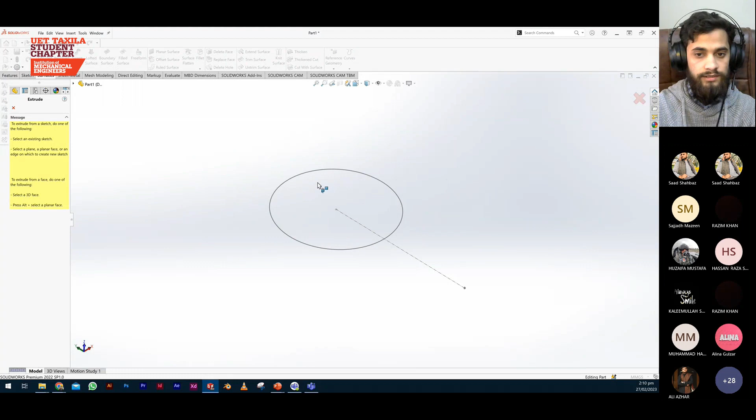Now let me just get rid of this, and now we will learn about the extrude command. So extrude command is actually the most basic command when it comes to solid modeling, and it is similarly used in surface modeling too. It just extrudes a sketch. By default, it extrudes perpendicular to the sketch plane that we are making, just extruding the sketch into one direction. But when you apply this to solid modeling, then you will have a solid body, a cylinder here. But when we apply this in surface modeling, then you will have a surface of 0 thickness. So this is about extrude command.

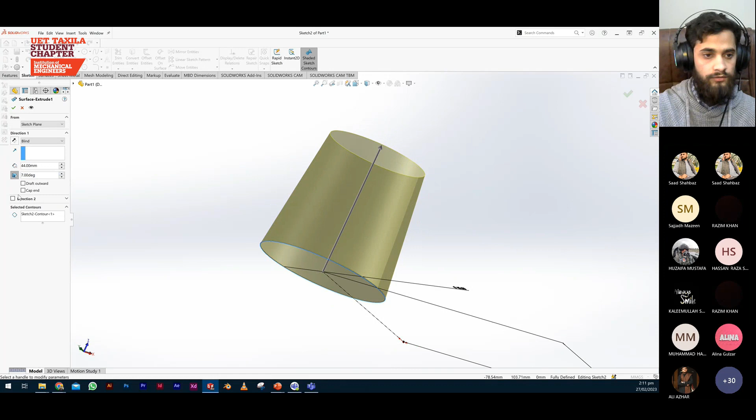And you can also play around with different properties of extrude command. You want to extrude from the mid plane, then it will extrude equally on both sides. You want to have a draft angle on the inside or on the outside. If you click draft outward, it will draft outwards, and this will be your basic extrude command.

Okay, so now we will move toward the next command, which is the revolve command. So for a revolve command, I will make a different sketch. Let me just have a center line around which we will be rotating our geometry. Let me create a basic sketch, something like a vessel or vase, with some basic dimensions.

30 millimeter over here. We'll add a horizontal constraint on these two points.

The most important thing when it comes to modeling, according to me, is defining your sketches. If your sketch has any blue lines, it means it is not completely defined, and when you want to move it, it can move. If you click some of the blue geometry and move it around, you will see the degree of freedom that I need to remove to define the sketch completely. Right now, if I move this point, it is only moving horizontally because all the other aspects of the design are constrained. So I need to constrain this degree of freedom to make sure my sketch is completely defined.

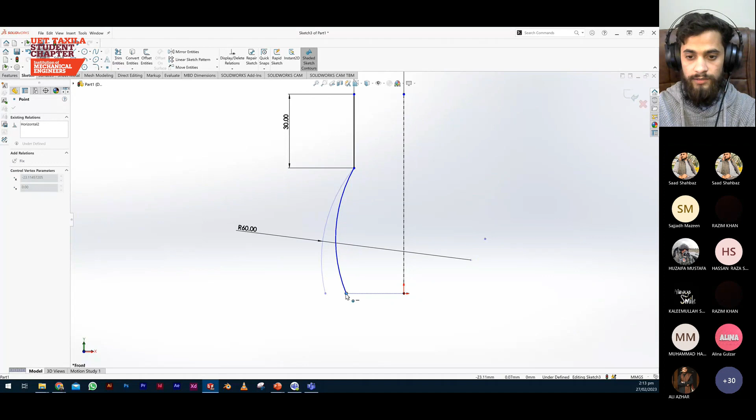To make sure this is defined, I will make it coincident to this line. Now this one is not defined, you can see. So I will give it a dimension right here. Let's say we give it 45. Now the sketch is completely defined.

Now we will go to the revolve surface command. You can see it automatically detects the axis around which it is supposed to revolve, and it will create a surface body by revolving our sketch around that axis. You can also play around with the properties of the surfacing of the revolve command. If I do not want to revolve a complete circle, let me just make it 90. It will just make a surface like this.

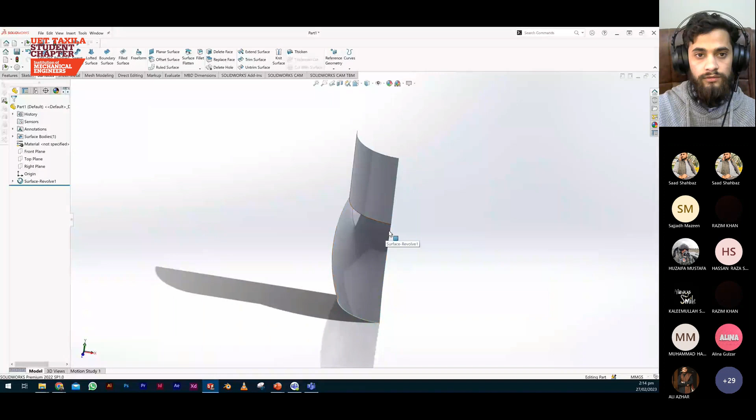Pretty simple, right? So these were our most basic commands, the extrude and the revolve command. You will find these listed in the solid modeling also. So now let me see which commands we are going to do next.

Okay, so I will explain these commands a little bit in detail: the delete face and the delete hole command. In Solidworks, you have pretty interesting commands which can help you remove some complexity from your model. For example, when you are working with a surface and you do not have access to the design tree, and you are supposed to work with some step file or something where you don't know how the design is going around, and you cannot edit it anywhere, you can use these direct editing commands to play around with that model. For example, I will make a hole into it.

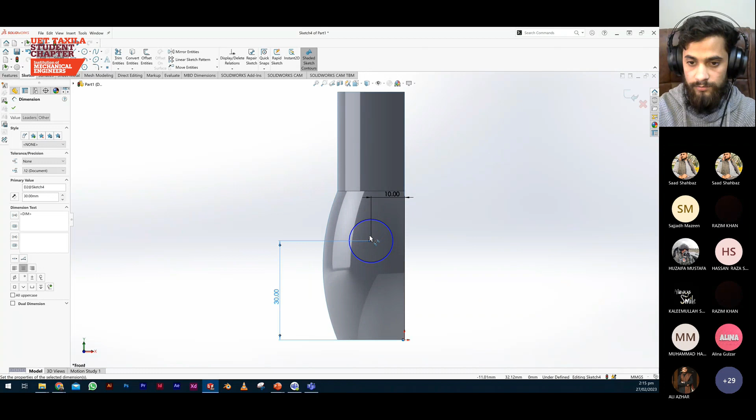I will also explain the trim command and the delete hole and delete face command here. Let me just, I have made a circle here. Now if we go into surfacing, we can see there is an option to trim surface. So what this command will be doing is trimming this surface with this sketch. It will just remove this area of the surface based on what I'm selecting. So now you can see we have a hole here.

So if you get a surface like this from a step file and you do not have access to the design tree, and you don't want to go into the hassle of figuring out how this surface is made or where it is defined, to fix this hole you can just go to the delete hole command, select the periphery of this hole, tick it, and the hole is gone. You can use these methods to fix the geometry of models that are not entirely in your control.

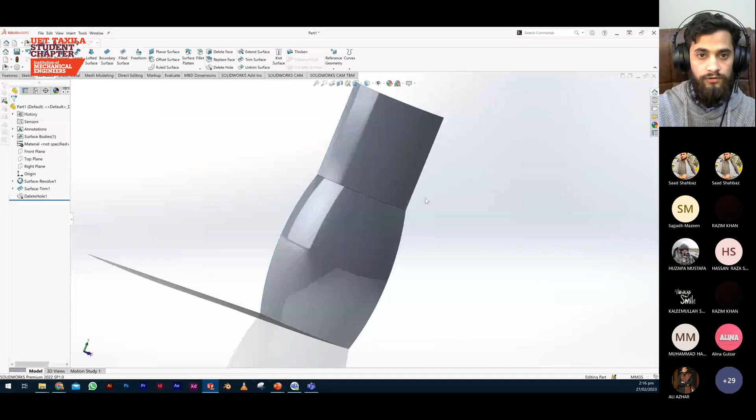Now I will apply a small fillet here to explain the next command. Let's say we have a fillet of around 25 millimeters here. Okay, so now the surface looks beautiful, but if you do not want this fillet, and this is from a model that is not in your control, completely from a third party or something, and you want to have the edge before the fillet was applied, then you can use the delete face command.

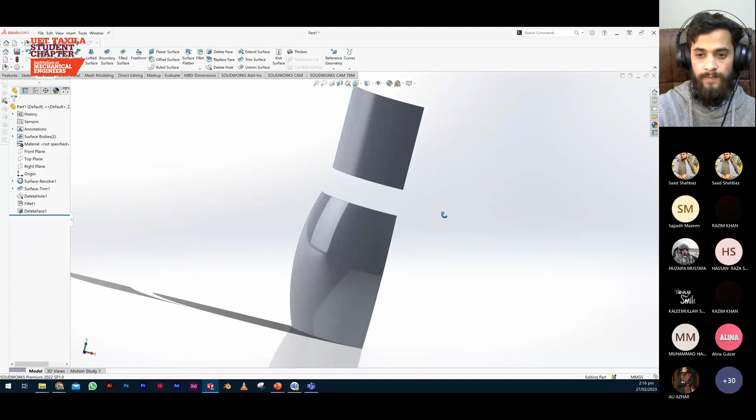What the delete face command does is, if you just select delete here in the left panel and select a surface and apply the delete command, it just gets rid of the surface that you selected. But the interesting thing is when you apply delete and patch, it deletes that surface and patches the surfaces that were connected to it. It automatically extends those surfaces to meet with each other so that your geometry is not affected, and you can use this command in solid modeling also.

So that was about delete surface. We have covered trim, delete hole, and now let's see how the untrimming surface works.

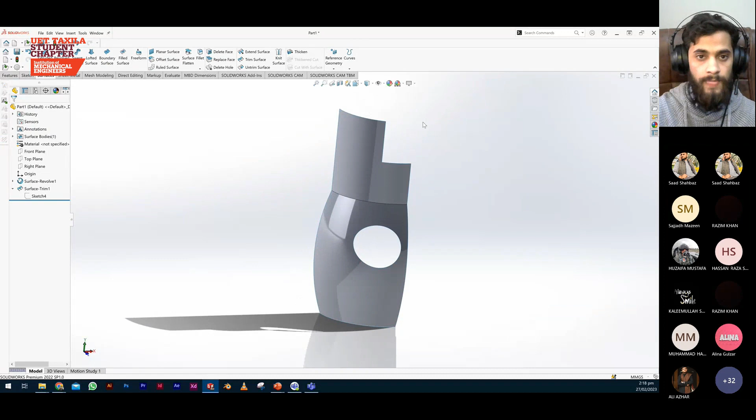Now if the surface is not only trimmed around this but also around this part, we have a cut of 15 millimeter by 10 millimeter here. So you can see this part is also gone, and you want to recover this part. You will select the untrim surface, give it the edge that you want to recover. It will automatically detect that this surface is missing and we need to untrim it. You want to click OK, and this is how it will fix the surface.

So that was about the untrim command, and now we will move forward to the next commands, which are sweep, loft, and boundary surface, etc. So I'm going to make a new sketch for the sweep command. Let's make a sketch.

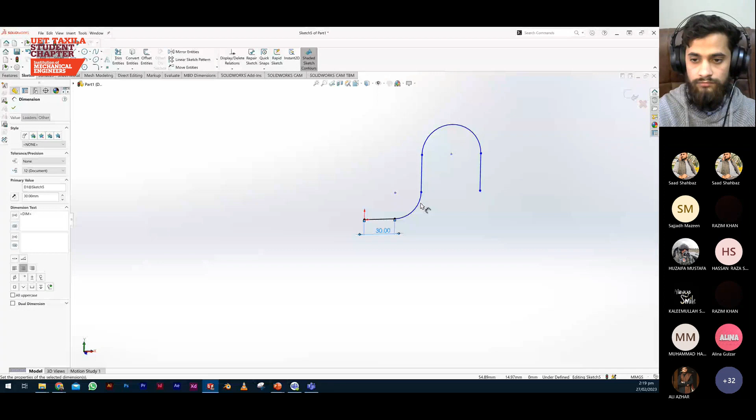This will be the path around which we will sweep a profile. Let me just define it real quick. This is our path sketch, and now we will have a profile sketch right around here. Let me just make a circle, give it a diameter of, let's say, 15. There we have a path sketch and a profile sketch.

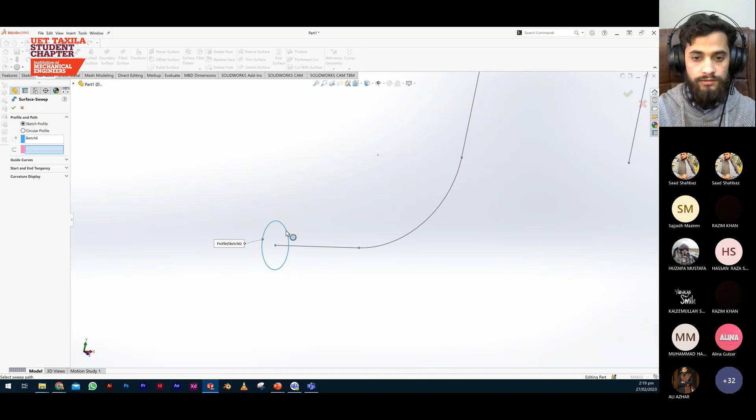And if we go into the sweep command and we select this profile and this path, then we will have a sweep command which is quite similar to the one we have in the solid modeling aspect, but you will see that it is hollow from the inside, and if I section it, you can see that we have a zero thickness surface here. This one is quite similar to the one that we have in solid modeling.

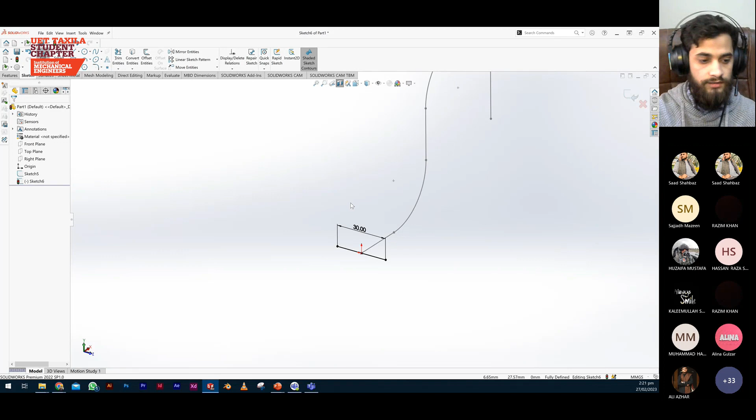So let us have a different type of profile here. If I edit this sketch and make an open contour here, which is just a line, and let's make it horizontal. When your sketch is completely black, it is a sign that the sketch is completely defined, and if there's something blue, then you need to find out which part of the sketch is not defined and apply constraints or dimensions to make it defined.

Okay, so this is where surface modeling is different from solid modeling. In solid modeling, we won't be able to sweep it around this path because it will say that it needs a closed contour. So if I make a surface out of it, then it can be done. It eliminates a lot of complexity from your design and makes several things easier for you. You don't need to worry about zero thickness geometric problems and things just not fitting in when it comes to solids.

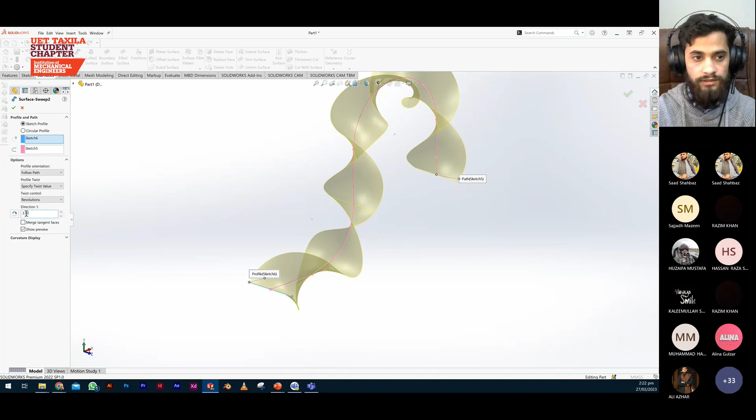That's where surface modeling is actually simpler than solid modeling. And one of the interesting things shows up when I am able to twist the path. Let me just apply a twist of revolutions. You can see it creates a very interesting form of geometry.

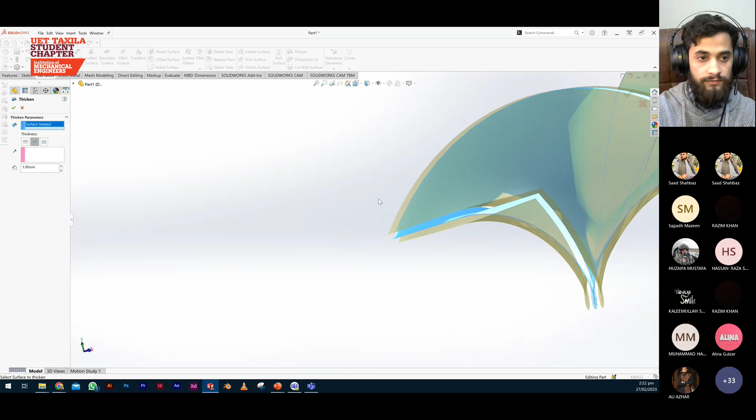As I mentioned, surface modeling is mostly used in parallel with solid modeling, and our eventual goal is to create a solid body, because otherwise you cannot manufacture anything with zero thickness. So if I want to apply a thickness to this surface now, I will use the thicken command, and let's say I apply a thickness of 1 millimeter. We can choose the direction of thickness. We have this direction, the opposite direction, and the mid direction. So when selecting mid direction, it will do 1 millimeter on both sides, so the total thickness will be 2 millimeters.

So yes, these type of interesting geometries can be created with surfacing, and they are way more difficult to create with solid modeling. It is possible, but it makes the process very complicated, and the modeling is mostly unstable, and it is very likely that you will get errors when you're changing your model.

So now we have also covered the thicken command. Now let's get rid of this also. Now we have the loft command, which is considered one of the complex commands when it comes to solid and surface modeling. So let me just create a sketch on top plane.

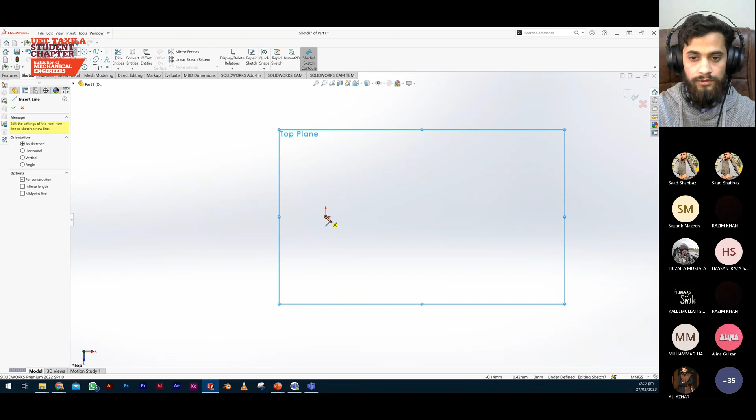Let's create a construction line here, and after that we'll get an arc here. It's coincident. Now I will apply a symmetrical constraint to these two points. So what this constraint does is it has made this and this point symmetrical around this axis, and if I move this part, the other part will move similar to it.

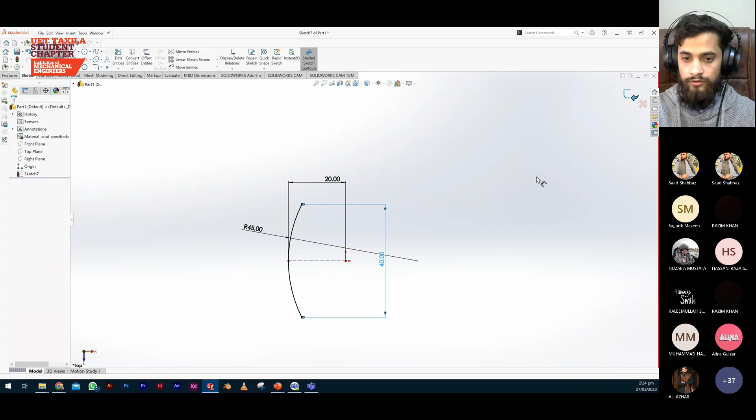Now let's say 45, and let's give this a dimension, and now the only thing which is left to be defined are these endpoints. So let's give a dimension of about 40 millimeter. So now we have one sketch here. Now let's go to the right plane and create another sketch, which will be quite similar to this one. So I'm making these sketches to actually explain the loft command.

Let me just define it like we did in the last one. 20. Let's make this... let's change this actually to 60. Now if I give one dimension here, it should completely define the sketch. But these are not symmetrical yet, so I will apply a symmetrical constraint here.

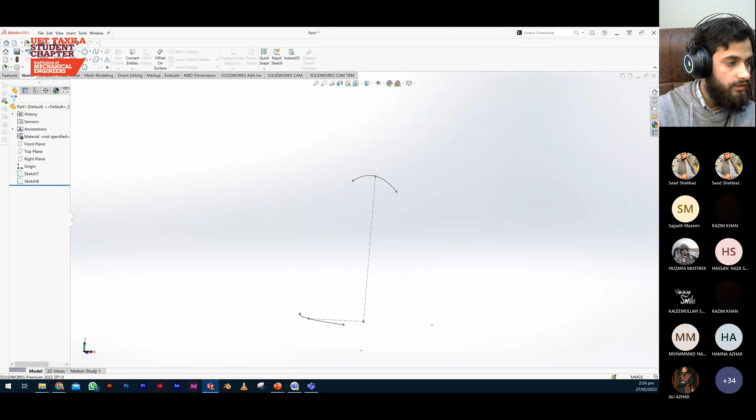Let's change this dimension, and now we will apply a loft command between these two faces. Let's choose the loft surface. I will choose the first profile and the second profile, and it will just bind these two profiles to make a simple lofted surface.

Now the interesting thing is that you can apply start and end constraints, the most famous of which is the normal to profile. What this constraint does is make sure that when you are creating a loft command and joining two surfaces like this, it starts with a curvature or tangency to the plane on which we have drawn the sketch.

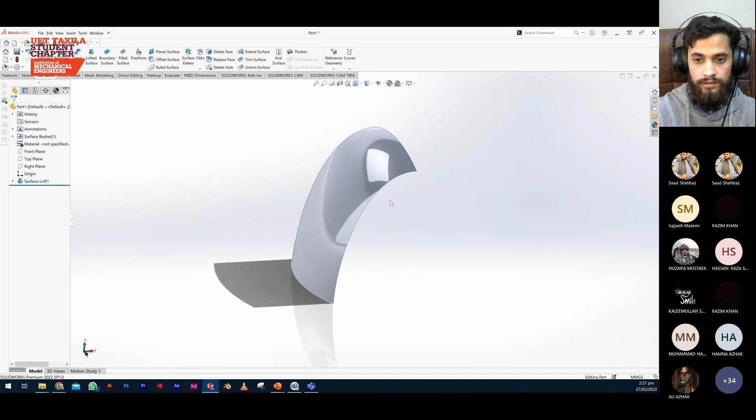So we will apply the same on this end also. And now if I click OK, you will see that we have a beautiful looking surface here.

Now I will go through the boundary surface. What the boundary surface does is you give it a specific boundary and it creates a surface by joining those boundaries. So if I give these two boundaries, its direction is not fine, so I will take this green line, and I think there has to be an issue.

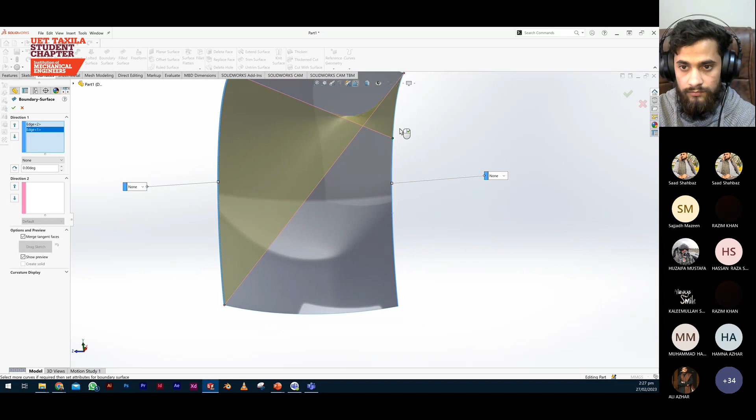Yeah, it's taking the edge as opposite, so let me just try to fix that problem real quick. Yeah, now it's fine. So what it did is create this line as a boundary and this line as a boundary, and creates a surface between those two lines.

So now we have a plane surface here, and if I go into the section view, you can see that we have two surfaces, one that we lofted and the other one as a boundary surface.

Now to go through the fill surface command, it is somewhat similar to the delete hole command, or in terms of the use that I'm going to put it here, but you will see the difference when it actually happens.

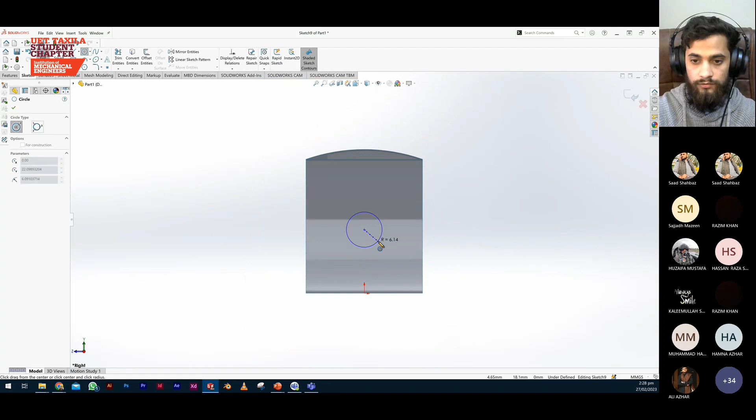So now let's create a hole in this lofted surface. How are we going to do this? We will use the trim command. This one will be the trim tool and this one will be the surface that we are going to trim. If we hover onto the surface, you can see the different sections it is trimming, so if I'm removing the selection, I will select this surface and click OK.

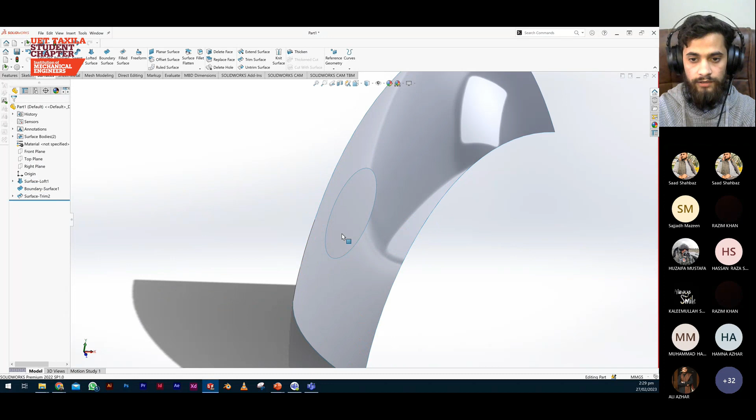Now we have a hole in our surface which we created with the loft command. Now let me just hide this one. If I choose the fill surface command and give it this boundary, it will fill the hole with a surface, which is not completely tangent to the boundary it is supposed to be on.

You can edit those settings manually, but if I section here, you can see there is a specific curvature difference between these two. Right from here it has a specific curvature, here it also has a specific curvature, but this one seems pretty flat.

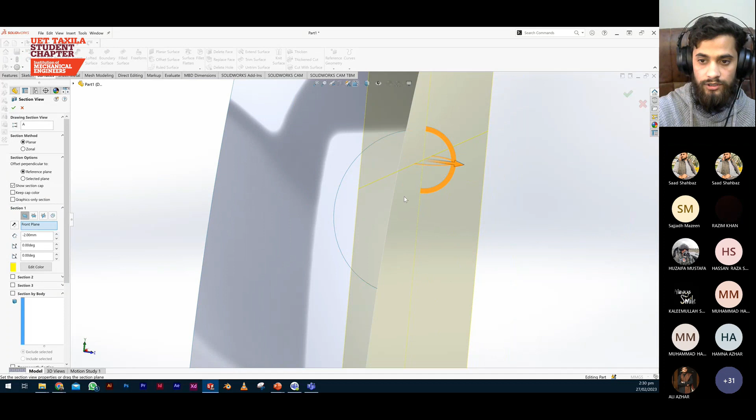So if I edit this and apply a curvature constraint so that it maintains the curvature of the surface it is connected to at the boundaries, now it will almost have the same curvature. If those two surfaces are joined together, you won't notice a difference here, and you will feel that this is completely actually a single surface.

So that was about the fill surface command, and now we have the most interesting command in surface modeling. One of the most powerful things you can do with surface modeling is convert a surface into a freeform surface. A freeform surface takes a surface and divides it into a grid.

Let me just show you. There you can see the freeform command. And if you select a surface, you will see that it divides it into a grid of different sections.

Now I will add a curve in the middle, almost in the middle, and after this we are supposed to add points to this curve that we have added. And now is the most fun part.

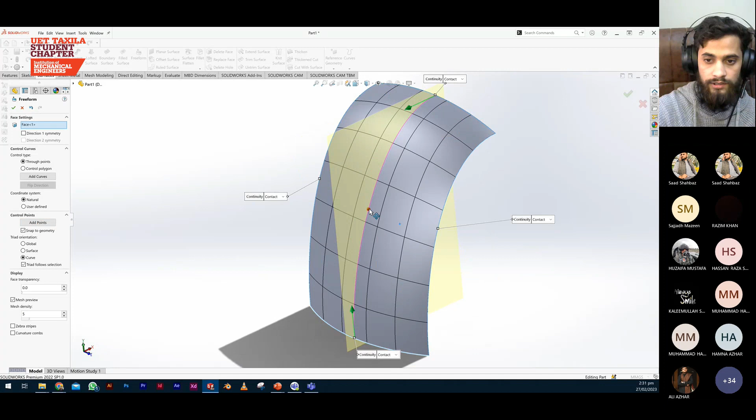Now if you select a point, you will see that it is giving you a specific option to move this point around in 3D space, and if you move it around, you can see the surface will move with it. This is the closest thing in solid modeling that comes to wireframe modeling or organic modeling, which is a completely different field.

So this gives you way more freedom over how you want to edit your surface. You can add multiple curves, you can add multiple control points, you can move them around to get a surface of how you want it to be.

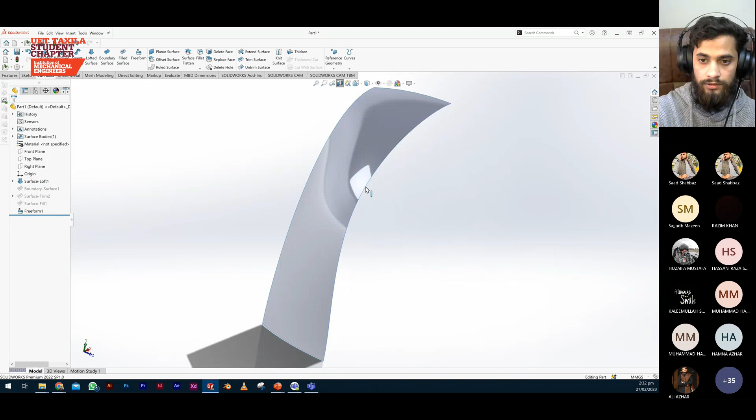If I go into the section, you will see that this line is deformed as compared to the sides because we converted it into a freeform surface. So this is one of the most interesting commands in surfacing.

Okay, so now let's finish up with the commands here. Let's just cover the offset surface and the ruled surface. So what offset surface does is it takes a surface and offsets it along the normal of the surface to a specific direction.

If I change the direction, you can see that this is up to where it will offset the surface, and it will create a new surface for you. So this is also one of the most interesting features of surface modeling that you cannot get with solid modeling.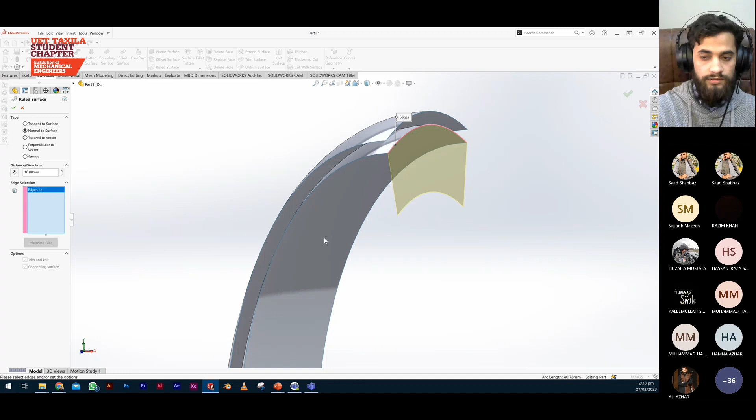And for the ruled surface, if you have a boundary of a surface and you want to extend it normally or tangentially to the surface, then you can do it with the ruled surface. There are a couple of different options too, but the most commonly used are tangent to surface.

If you click tangent to surface, you can see that it is creating a surface which is tangent to it. And if we create normal to surface, then you can see that it is creating it normal to the tangent of the surface. So this is the ruled surface.

Let me see if we have anything else to cover. I think we have gotten almost everything. Only one of the finishing commands is left, and that is the knit surface.

Let me just delete the commands that we are not going to use here, and suppress the boundary surface. So you see we have this boundary surface here and this lofted surface here. And if you go into the surfaces menu, you will see that we have two different surfaces.

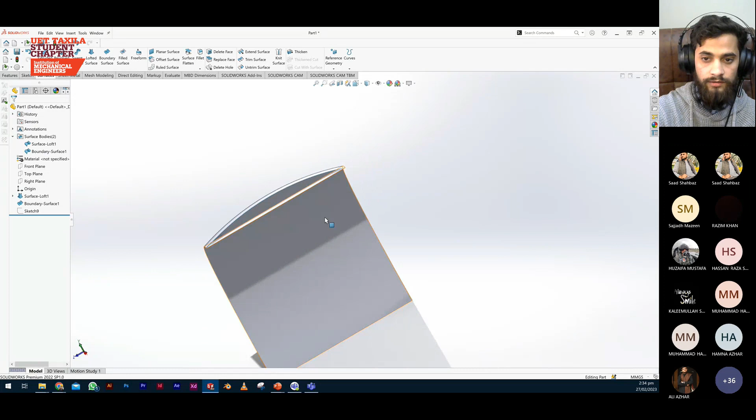It is not treating them as a single surface, which can be further used to do different things at the edges, apply fillets and manipulate the surface as a single surface. So for that reason, what we need to do is we need to knit the surfaces together.

So when you are knitting the surfaces together, the surfaces need to touch each other at the edges. If I knit them together, you can see that before I applied this command, these edges were blue. The blue edges represent that a surface is ending or starting from there, like these edges.

But we don't want to end this surface here, and we want these two surfaces to be treated as a single surface. So if I apply the knit command, you can see this edge is converted to black.

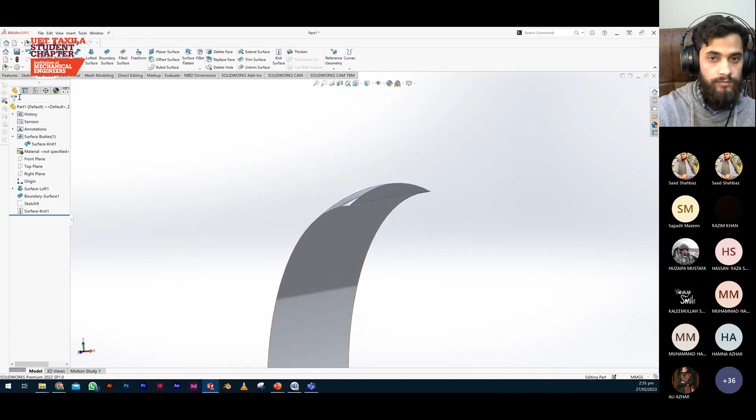And now if I wanted to apply a fillet on this edge, let's say a fillet of around 1 millimeter, then you can possibly do that.

One of the other features of knit surface is that if the surfaces combine to form a closed geometrical space, then you can also convert your surfaces to a solid inside that knit command.

For example, if I create two planar surfaces, if I select this boundary and this boundary, it will help me create a planar surface between these two. So now this open end is closed, and now creating another planar surface, we have this end also closed.

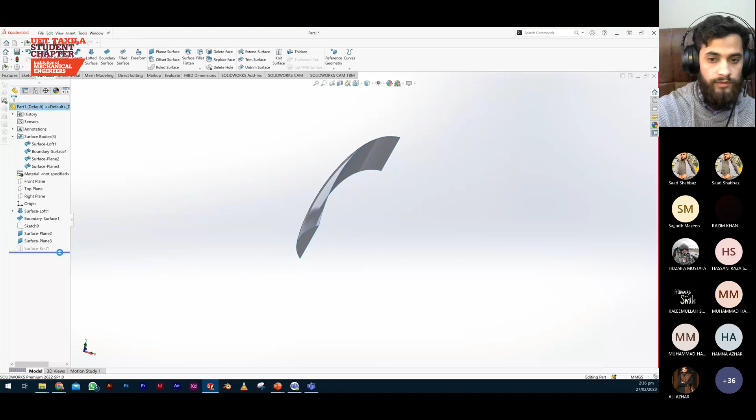Right, so now if I join these surfaces, they will create a watertight geometrical space. But right now there are four different surfaces - this is 1, 2, 3, and 4. So if I knit them together, if I add the knit command and give it the two additional surfaces that we created too, then you can see this option to create solid would be available. If I take this option, you can see now we have a solid body, and if I section it from the middle, you can see that it is solid from within.

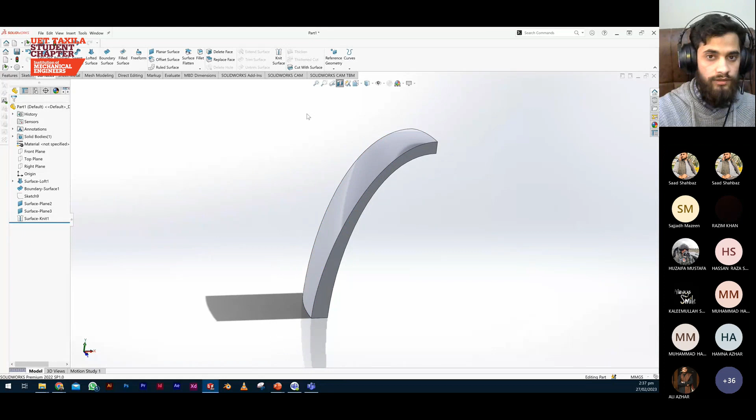So yes, these are the two commands used to convert a surface to a solid: one is the knit command, used to convert a closed space into a solid body, and the other is the thicken command, used to give a specific thickness to a surface, saving you from the hassle of making it with solid modeling. If I convert this, for example, to a solid body, you can see only the top surface is given a specific thickness and converted into a solid. So either you do surface modeling and then convert it into a solid body, or you use surface modeling in combination with solid modeling, so that you can use surfaces as a reference to aid in your solid modeling process.

Okay, so now let's go through some exercises which will explain the uses of the surfacing commands.

I think we are also running out of time, so I will be doing only one exercise here. This is the exercise we will be going through. If anyone wants to take a screenshot, or I will send this to you afterwards so you can follow along. Let me get it to the other screen and now open a new part.

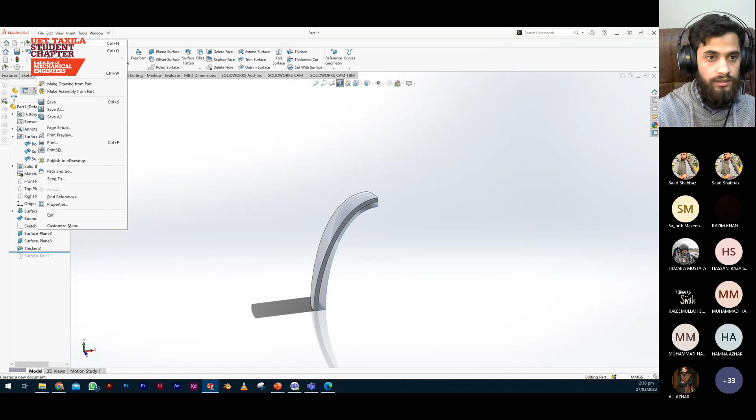The thing we are going to do here can probably also be done with solid modeling, but right now we are doing it to show how these commands actually work in action.

So right now I will create this line. I will give it the dimensions given in the drawing, 95.5 here. I will give it an arc. Just speeding through the process so we can get there in time. Line some reference lines over here and here. Now I will give the dimensions to these reference lines, 100 degrees and 105. Now for the dimension, you can see in the top view that we have a dimension of 33 over here, and also over here.

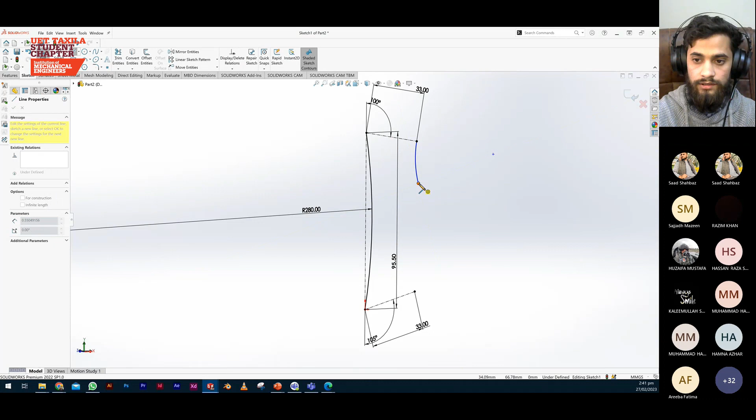Okay, so let me just go through the exercise. Now we see some specific curves here. You can see this curve - this is actually made of 3 different arcs. So we just need to make 3 arcs here and define them according to the dimensions provided. This is the first arc, this is the second one, and this is the third one.

Now let me just define these real quick: 25, 30, and we have 50. And we have a constraint here which is not supposed to be there - let me just remove it so that this curve can also move around. Now the final 2 dimensions are from here, 47, and from here, which is 65.

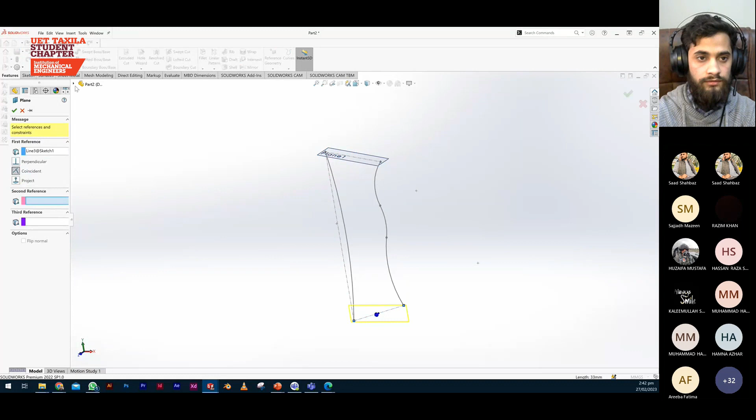Now we have 2 control surfaces for the loft command that we are going to apply here. Let's just create 2 surfaces on which we are going to get the profile. I will select this and this one to create the first surface, and then this and this to create the second surface. Now on this surface we are going to make this profile, 33 by 25, an ellipse - not too difficult. Let's just select an ellipse, and okay, it's the other surface.

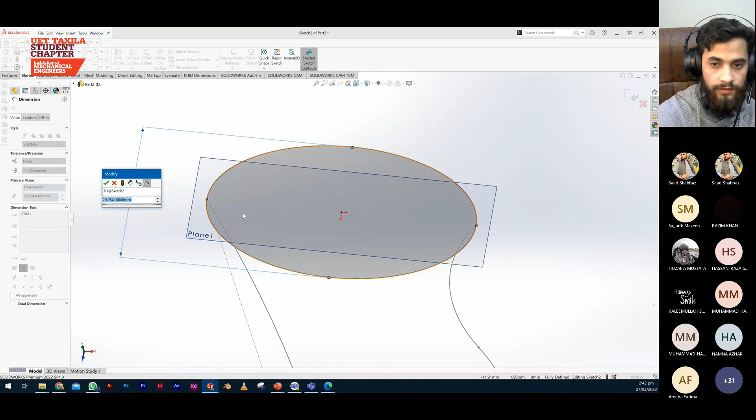Let's just make an ellipse here, to give it a dimension of 25. For the second one, we need to make a sketch on this. Let's make an ellipse here too, and right here we have the dimension of 28.

So now we have the profile, we have 2 control surfaces, but we need 2 more - you can see on the first page. Let me just show you: so we have this radius also, which is a 330 radius from the sides.

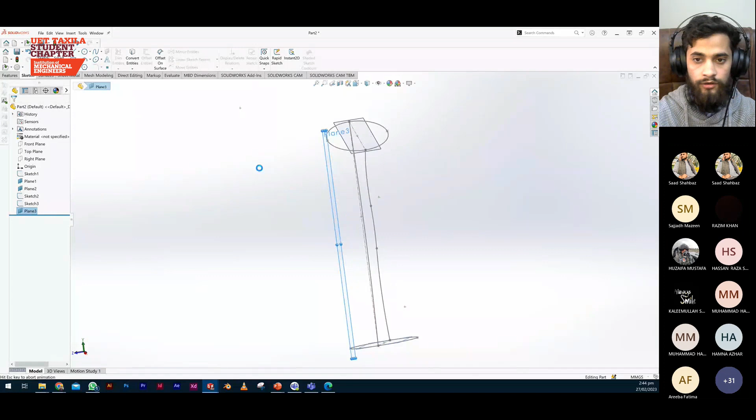So for those I will need a custom plane. First of all, I will select these 2 points and the front surface - so there we will have our reference surface on which we will draw the control lines. So I just need to give it a dimension of 330, and it's completely defined. Now let's just mirror it to the other side.

Let's mirror it around this midline, and now we have all the sketches that we need for it.

Now I'm going to apply the surface loft command. I'll select the two profiles, and then we are supposed to select the guide curves. We have four guide curves: one is this, and the other is a combination of this, this, and this line. Now for the side ones, this is one and this is one.

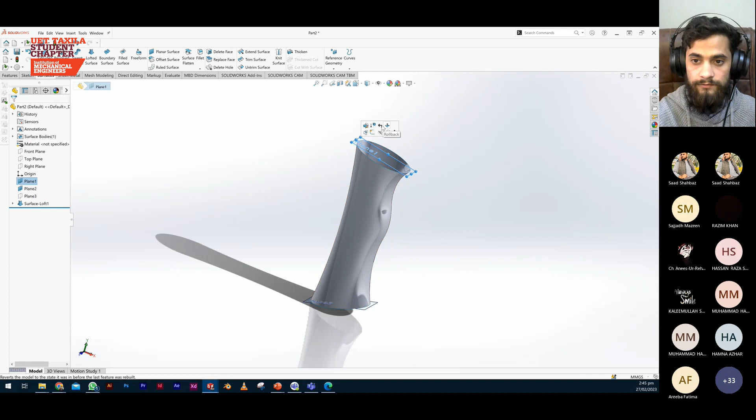Now our lofted profile is ready, and these sort of aesthetic curves are easier to draw in surface modeling than in solid modeling. Let me just make two planar surfaces, one here and the other one here. Now if I select the knit command and select these three surfaces, I will have the option to create it into a solid. So that was the exercise for surface modeling.

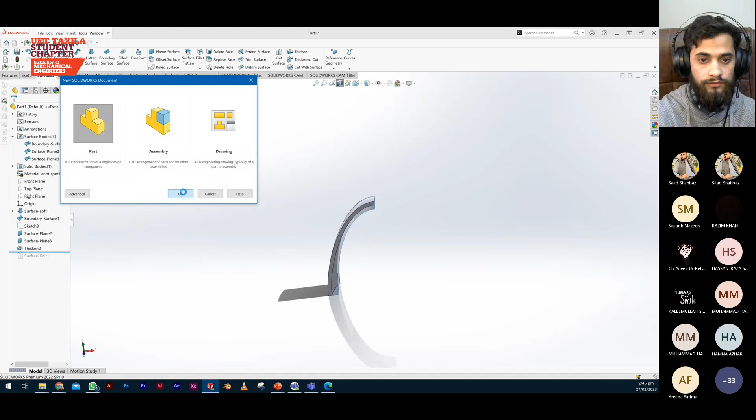Now let's jump into the section of advanced design methodologies, in which first we will cover the usage of equations. For equations, you can think of it like this: if your design is driven by some specific equation, like this side is multiplied by 2 to create this side, or the length is twice as long as the width, then you can create variables and define equations inside SolidWorks, and SolidWorks will keep track of that. Let's go through a basic exercise.

To access equations, go into the Tools drop-down menu, and there you can find Equations. Right here you can make global variables. Let's say the first variable is a, and a is 20 millimeters. Then we create another variable, b, and b is 30 millimeters. Then let's say we have another variable which is 10 more than a, written as a plus 10 millimeters. You can see we have 30 millimeters here, and if I change a to 10, the other one will update itself.

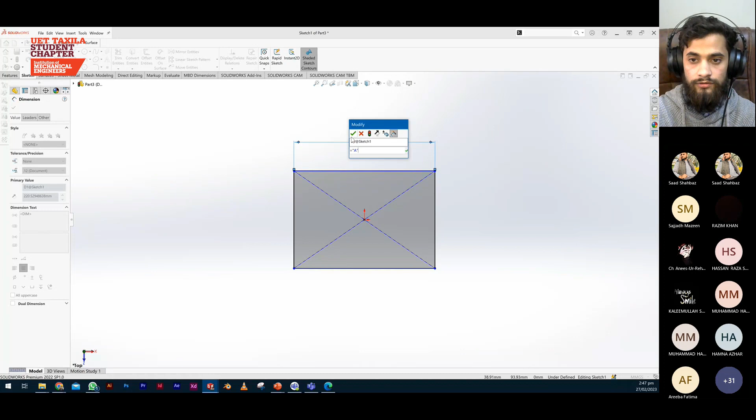Let's see how we can use this inside our design. We will draw a sketch on the top plane and draw a simple rectangle. When you give it a dimension and click the equal sign, you have the option to apply global variables, functions, or file properties. In global variables, I want to give this dimension a value equal to the variable a. If I click a, you see an equation sign showing this dimension is driven by a variable. Now if I apply a dimension here and want it equal to variable b, I select b and click OK. Then you can see this rectangle is defined based on the variables we created previously.

Now I want to extrude it equal to the variable c, which is in turn connected to variable a. If I select c here and click OK, it defines the extrusion as being 10 more than the variable a.

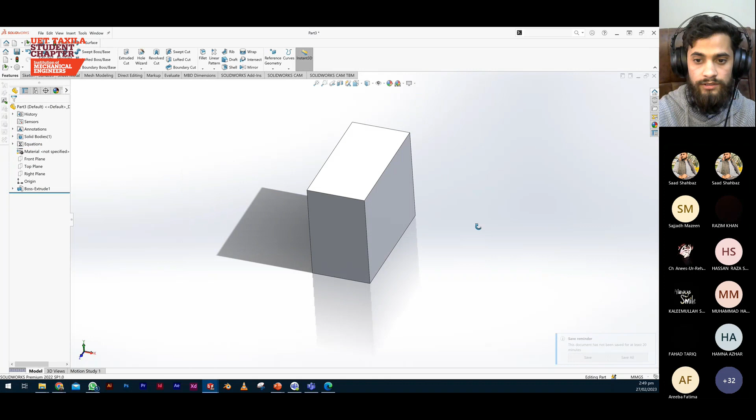If you want to access equations after generating variables, you can do so from Manage Equations, where we have all the variables we created. If I change it to 15, the design will update in real time—see, it changed all the values in the equations.

So that was the use of variables and equations for modeling. Now let's see how we can generate configurations.

If I delete this, you will get an error because the variables we defined are missing. So you just delete it from here and it will be fine. Delete these two, go to Manage Equations, and delete this.

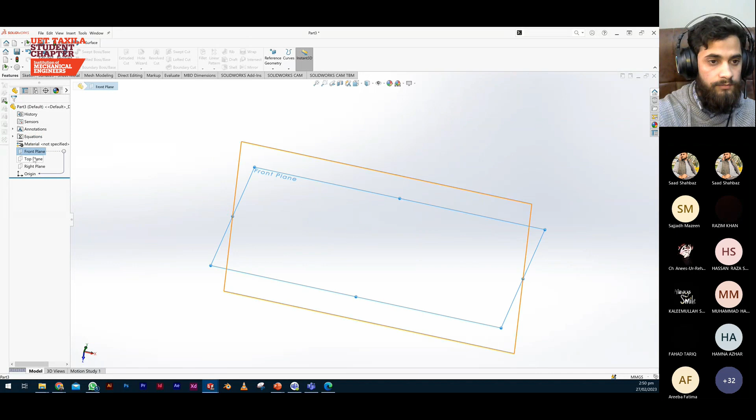Okay, so now we have a clean design tree. Let me create a part in which we are going to revolve a specific piece of geometry.

Configurations are basically used to make different parts which are similar in their design intent, but you don't want to make separate parts for them. For example, if I have a circular part right here which has a diameter of 10, let's say it has a thickness of 8 millimeters.

Another important thing is you can directly use equations without creating variables through this method. If I want to keep this thickness equal to this thickness and want to keep them connected, I will just click the equal sign here, and instead of going into global variables, I will keep my cursor here and click on this dimension. This will connect these two dimensions and make sure that if I change this one, the other one changes as well. So in this way you can make use of equations within your sketch without having any global variables. Let me give it 20 here and 30 here.

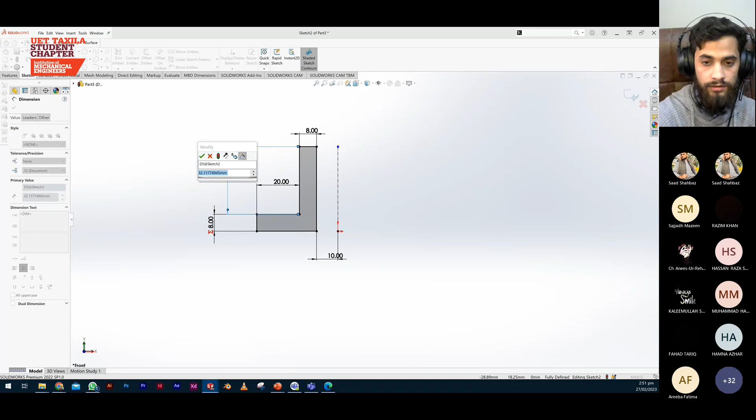So let's revolve this part. Okay, so now we have a part here, and let me create a series of holes in here.

Let's create a hole with a diameter and a distance of, let's say, 25 or 26. You can see that this is the only degree of freedom that is remaining. So if I give this a constraint of being horizontal at this point, then this will be completely constrained.

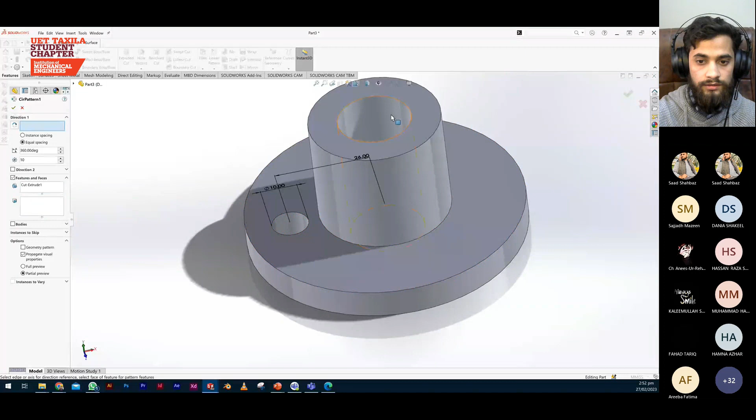Now let's make a hole here, cut through all, and now we have one hole, and I want holes all around it with a specific amount of holes that I need. Let me use a circular array. The feature I want is this one, and the direction is this. So now let's have 6.

So now we have a basic part here. Let's just give some fillets, diameter fillets here and here, so that it looks less boring.

So now I will tell you how you can create different configurations of this part. So you are designing a part and you feel like you need another similar part which is similar in shape, but has different dimensions and different amount of holes or anything.

So I will go into this tab. You can see right here the property manager, and inside the property manager you have configurations. If I right click on it, it will give me the option to add a configuration. So let's say I am doing a version 2 of this part.

Okay, so if I am changing any dimensions here, let's say version 2 is going to have a different thickness, let's say 6 millimeters. So one thing you need to notice is that if I am changing the dimensions here, there's a small sign right next to it which says all configurations, which means if I change this dimension, it will change the dimension in all configurations.

And if you want to keep the changes only in your current configuration, then you need to come to this drop down and select this configuration. Now if I change the thickness to 6 millimeters, the dimension is changed and it will only be changed in this configuration. Let's say we change this one also.

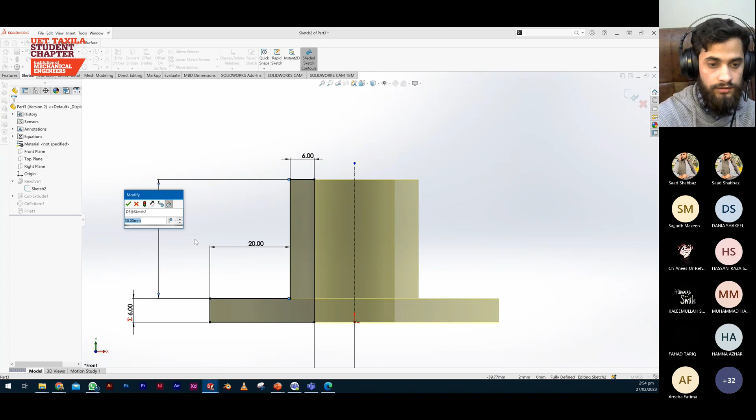We have a thickness height of, let's say, 30, and for version 2, let's say we have fewer holes.

So this can be a little tricky, but you don't need to actually go into this command. You can just click here and it will show you this small variable 6. If you double click on it, it will give you the same dimension-changing menu that we had inside our sketch. So let's say we are only changing this configuration and we have 4 holes in this configuration. If I rebuild, you can see we only have 4 holes now.

So now we have a new configuration. Let's see how we can get our previous configuration back. If I double click on our default configuration, it will take us back to our previous design, and the version 2 that we created is still there in the form of different configurations.

Another thing I would like to mention here is if you are making an assembly, a new assembly, and you have one part but different configurations for it, then you don't need to worry about exporting different parts inside it. We need to save that part before I'm able to insert it into an assembly. Let's say we save this as part 3.

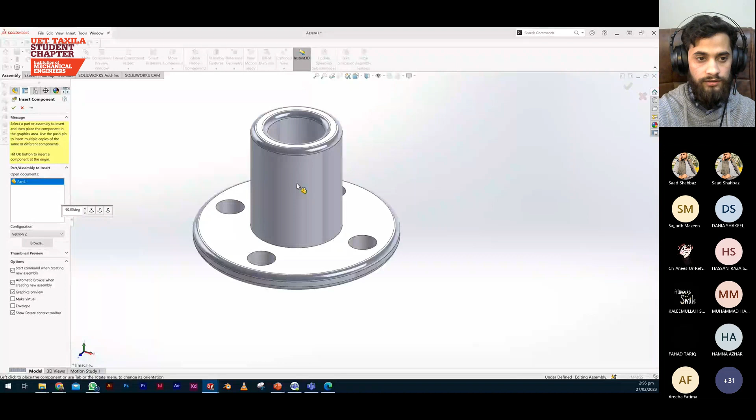Now if I insert the component of part 3 into here and click OK, and if I click this part, you can see there is a little drop down here which asks me which configuration I am supposed to put here. If I want the default configuration, I will click default and click the tick mark, and it will give us this part.

And in the same part, if I create a copy of it and want a different configuration of this part, I will select version 2, and you can see we have both parts driven by one part file in the form of different configurations of this part.

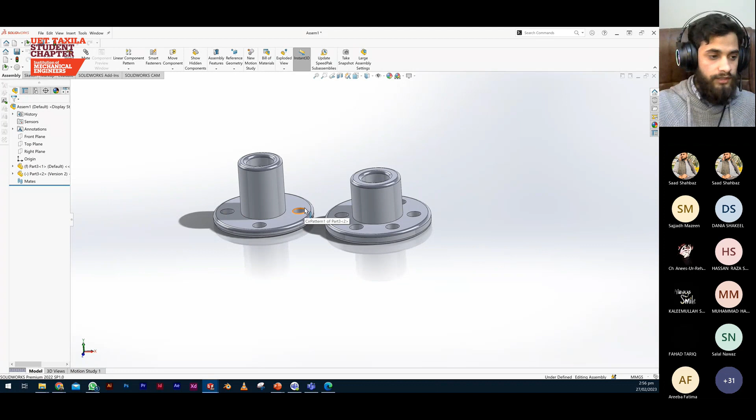So this technique is used when you are supposed to create a lot of parts and you don't need to create a separate part file for each part or model name. You can create hundreds and thousands of variations of a single part if possible.

So that was about configurations. Now let me show you something else to demonstrate one more thing I think I skipped. If I add a configuration named version 3, I want a version 3 of this part, and in this, along with changing the dimensions...

Let's say we have a 60mm long part with 25mm width. Excuse me, I'm supposed to select this configuration only here. So with a 25mm wide base, and the thickness, let's say in this one will be 5mm.

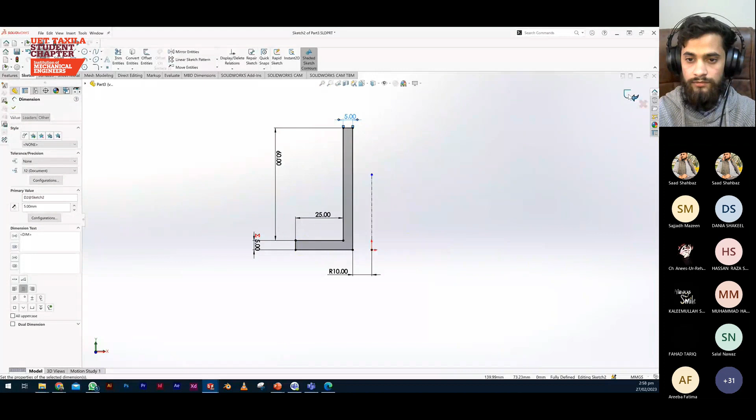In this part I want that there should be no holes, and I don't want this command to actually be in this configuration. So if I right click on this command and click configure feature, you can see I have the option to suppress the command in some specific configurations.

So I want to skip this one in configuration 3. I will suppress it, and you can see if I go to the other ones, we will still have holes, and if I go to the third one, it will not have holes.

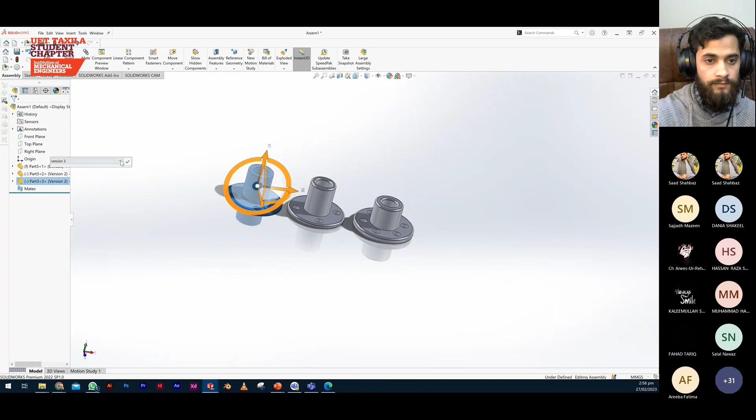So if I go to the assembly, similarly I can just take another piece and make this one version 3, and click tick. So you see we have 3 different configurations of the same part in a single part file.

So now coming to our last module, I want to show you the usage of sketch blocks. What sketch blocks are is like a sketch inside a sketch. It creates a sub sketch, you can say.

If I create a sketch here, you are at the initial idealization of a product and you want to see whether your mechanism will work the way it is supposed to or not. So let's make a 4-bar mechanism. This is how a 4-bar mechanism looks like.

So if I'm telling someone who is a beginner at Solidworks to make something like this, he will think he needs to create different parts and then make an assembly and show me how it is rotating, these are the degrees of freedom, and you don't need to go through all that if you need only visualization of your mechanism or product.

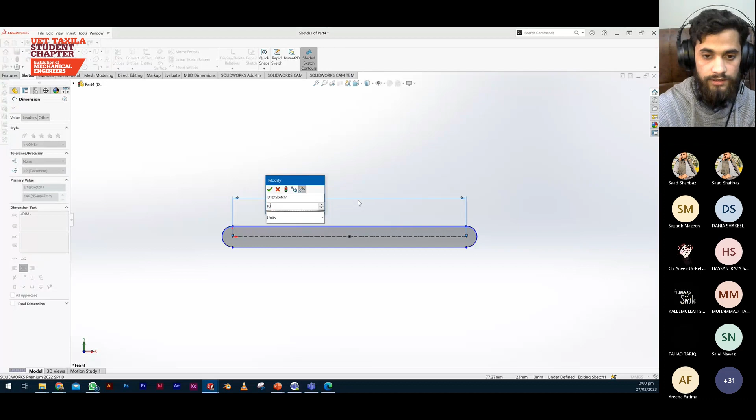So we can do it all inside actually one sketch. Let me just create a basic link here, and give it some dimensions. Let's say it's 100 millimeters long and it has a radius of 3 millimeters.

Now if I want to make this into a sketch block, I will click on this slot, and there you can see there is a small option to make it into a block. If I click OK here, you will feel like you have come out of editing the sketch, but that is not the case. It's just that it has created this into a sketch block inside that sketch.

So let me just create some more, and you can see we will be able to move it around in 2D space because it is now a sketch within a sketch. And to constrain it, we need to apply the same principles. I need to make it coincident to here, and it will be able to move around in a circular path.

So if I make this horizontal, now it cannot move. And you can also copy and paste a sketch if you want multiple sketch blocks with the same geometry. So if I select the sketch block, press Ctrl C, Ctrl V, you can see we have another one.

And if I change dimensions in this one, let's say I give it 120, the other one will also change along with the old one. So I'll just make it 100 for now.

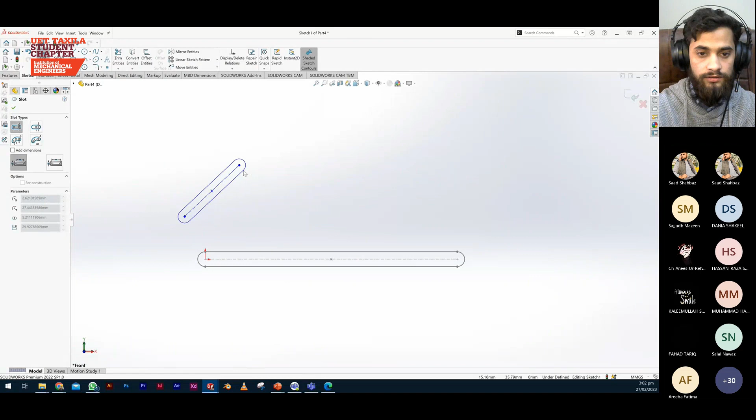We'll delete this copy because we don't need it. Now we'll create another sketch block right here and give it a dimension of 30, with a radius of 3, as with the previous one. Now click this to make it into a block.

Now if I constrain it to this axis, you can see I can move it around, so it kind of feels like it's working in the form of a mechanism, right? So let me go to the interesting part. Let's create another one.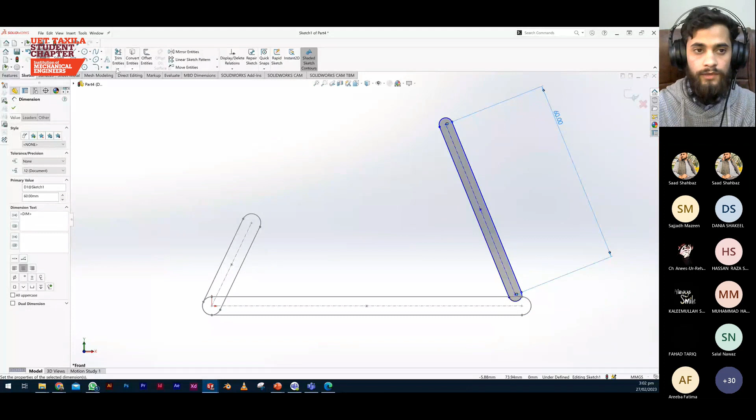Let's give the dimension of, let's say, 70... be like 60, and the radius will be 3 like the previous ones. Now let's make it into a block. This is also a block, and we will make it coincident to this end. So now you can see we have two links which are moving independently of each other.

And the fun part begins at the next link. Let's say we have another one equal to almost 90, with a radius of 3. I'll make this into a block as well. And now if I make this coincident to this one, it will kind of act like a robot arm.

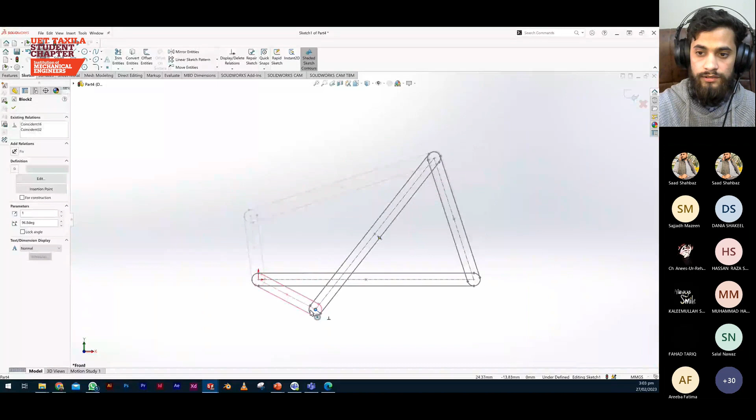And when I make it coincident to this one, okay, now if you move this part, you can see the other one will move around in the form of a mechanism, which is a 4-bar linkage mechanism. And you did not need to make any additional parts or assemblies to create this.

You can go on and make it more complex if required. You can add multiple different joints, give them constraints, and move it around to see how your mechanism will move when creating a product from scratch. You are at the very initial stages of ideation in your product development cycle.

Okay, so we have another block, and let's create some construction lines. Let's say I want to keep this one coincident to this line. Let's give it some dimensions, 70 and 30.

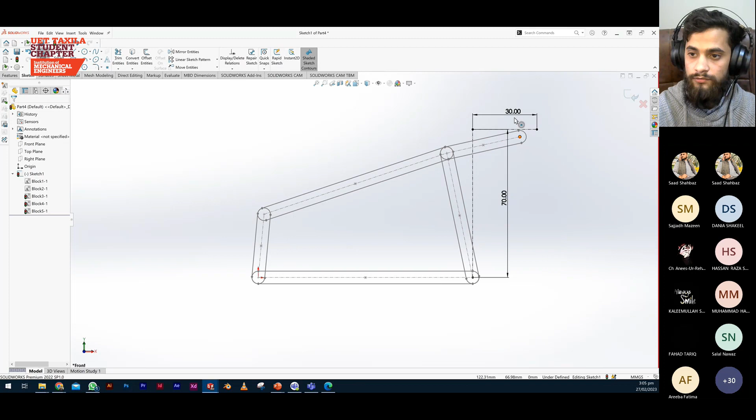Now if I make it coincident to here, and this one coincident to this line, if I move this, you can see the part is moving in that linear direction that we applied the constraint to it for.

So these were the topics that we were supposed to cover today. I had one other exercise for it. Is the host still in the meeting?

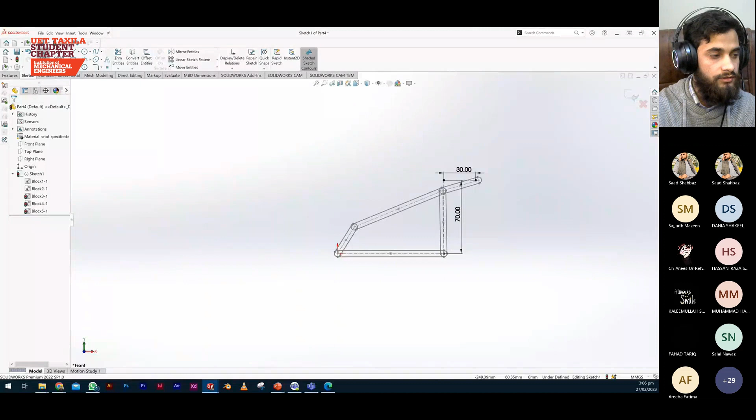Yes, I'm here. So do we have any more time for the session, or should we have questions now? The session goes up to 3:30, right? But I also wanted to leave some time for questions. So let me know if we can possibly cover another exercise or not. Please wait, I'll confirm with you. Okay.

Okay, meanwhile, we will play around with this mechanism and see what we can do. You can see it gets stuck at a specific point because it's being pulled to its extreme position. If I move slowly, you can see it will not move past this point. This gives you a pointer that if you create a mechanism with these dimensions, it will not go through the complete circle, and you didn't need to make different parts and assemblies, then edit parts to confirm whether the dimensions are appropriate for the design. You just did it inside a sketch.

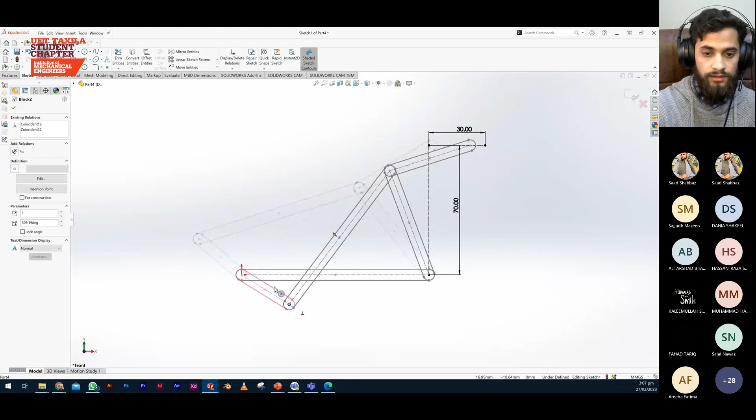So if I edit this dimension now, let's say we have 45, and now if I move it, it will go into a complete circle. So you can use these methodologies to actually make your process of product development much simpler than it is.

Okay, so I think to save time, we should go through some parts which are already made. We'll just open some parts. Okay, let me go out of the sketch. So this is one of the parts that is very difficult to create with solid modeling. You need to shift to surface modeling to create a complex geometry like this.

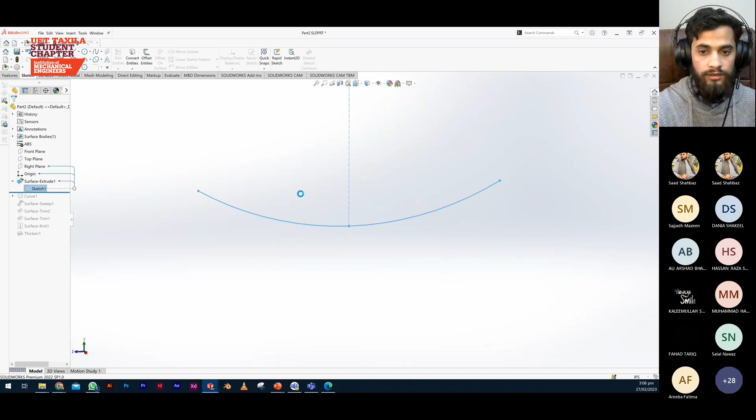So I will take you through the process of how I did it. First of all, we have a sketch on a plane. I will also show you the drawing for this part. This is the drawing that I used to make this part. You can see that it is almost a 2D surface, but it has a specific thickness to it. So the first thing we noticed from this drawing is that we can simplify our process by creating a 2D sheet and eventually giving it a thickness, so we don't need to worry about the thickness at each point in our design process.

First of all, I created a sketch here, and then I extruded a surface from it like this. Then I created a curve, and a sketch on the top plane. You can see this is a flat sketch, and the dimensions are all given in the drawing.

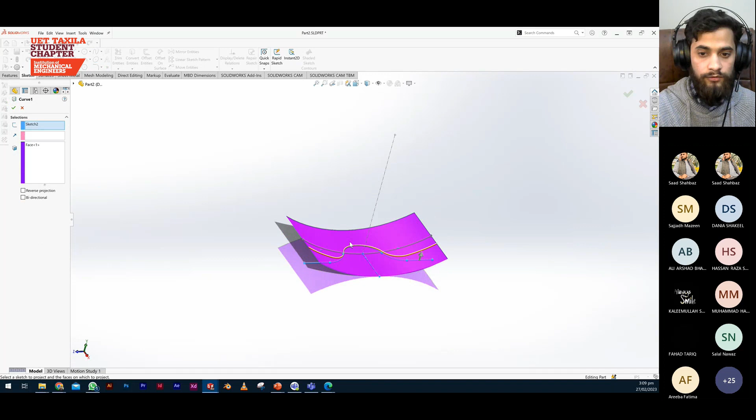And when I used the command of making a projected curve onto the surface, it projected that sketch onto this surface and gave me this curve, this yellow curve. After creating a projected curve, we can use it to make a sweep command.

So I used this sweep command. I selected this projected curve as a path. I did not need a specific sketch profile because in the sweep command you have by default an option to create a circular profile. It just creates a circle by keeping the profile you are selecting in the center. And after this we have a swept surface along the path that we created.

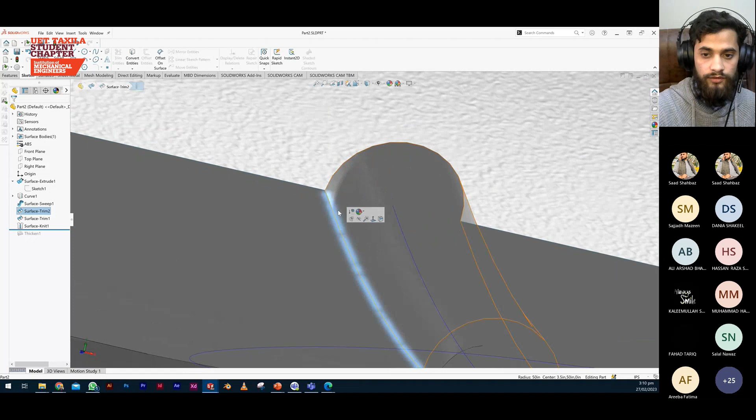After this, I trimmed the bottom of the circular surface by using this as the cutting tool. Then I used another trim command to get rid of the surface in the middle. And now as you can see that these surfaces are touching at the edges, we can use a knit command. So when I knit the surfaces, it joins these edges to create a singular surface.

After that, the only step left was to apply a thicken command and give it a specific thickness. And if you try to make this geometry with the solid modeling approach, you will run into different issues at different points, and it will not be as easy as it was with the surfacing approach.

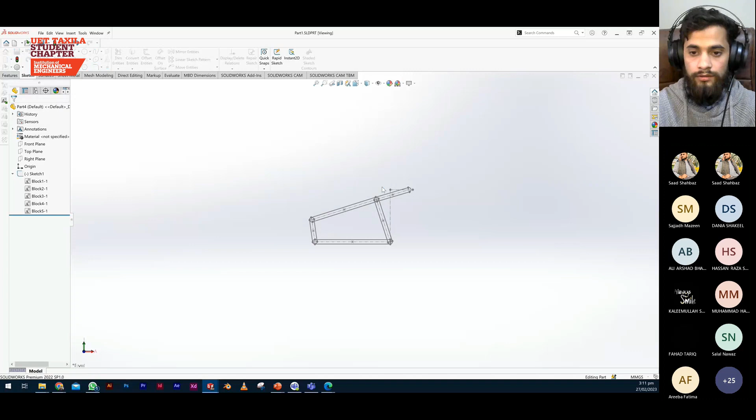Okay, let me go through another example here. I think I need to open it from here. We have part 1. Okay, this is the one that we need to close. So this is the part that we created initially, this one. I was just messing around with it, and let me show you the possibilities you get when you are working with surfaces.

So after knitting it, you get a solid surface, right? It is solid from within. And now if it is supposed to have a covering around it, a plastic or silicone covering, what we can do is offset a surface from here. I selected this surface and selected an offset of about 1.5 millimeters. Then I drew a sketch on the side plane and trimmed the surface from top and bottom.

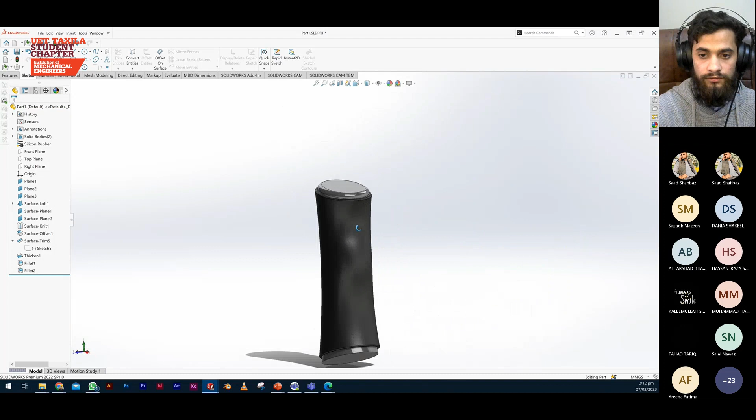After that, I applied a specific thickness to the part and gave fillets on top and bottom to make it look more beautiful. You can see now it looks like it has a very beautiful covering around it, and this type of thing is very easy to do with surface modeling and quite difficult to do with solid modeling.

Okay, so now let me just go back to the presentation.